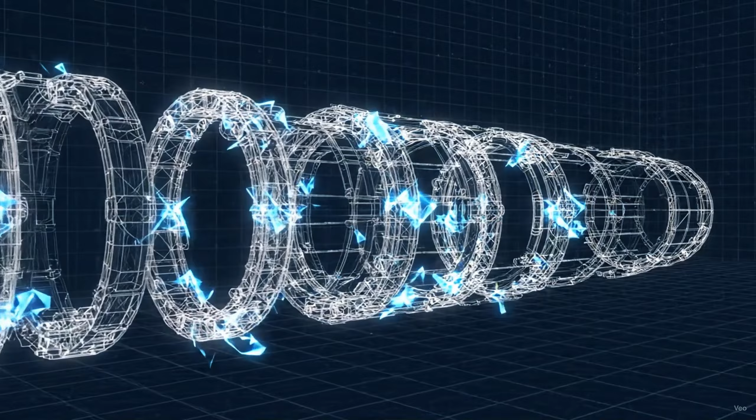To operate from aircraft carriers, an aviation platform requires more than just aerodynamic lift. It requires a structural foundation capable of surviving the most brutal kinetic impacts. The core skeleton begins with massive aluminum alloy bulkheads. This design generates a characteristic barrel-shaped fuselage, prioritizing absolute structural rigidity over minimal frontal area.

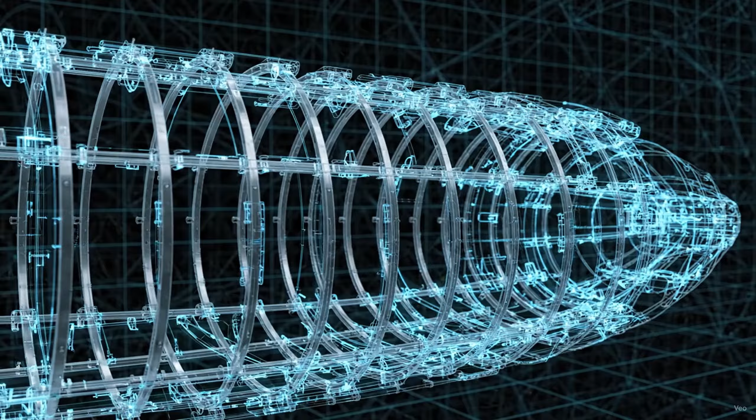Piercing through these bulkheads are dozens of longitudinal stringers. They interlock the entire skeleton into an unbreakable, cross-hatched alloy matrix. This is the semi-monocoque architecture, a design that mathematically distributes severe bending and torsional forces evenly across the entire geometry of the airframe. Wrapped around this skeleton is the aluminum alloy skin.

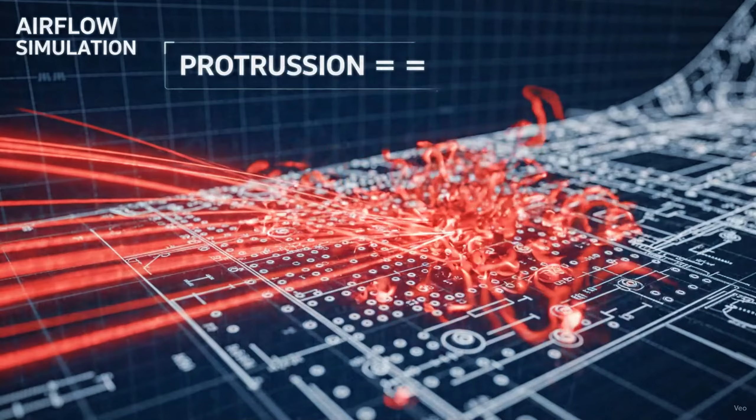In a semi-monocoque design, the skin itself acts as a critical, load-bearing structural membrane. However, at flight speeds exceeding 600 kilometers per hour, even the smallest protruding rivet head creates aerodynamic turbulence, generating massive drag. The mathematical equation is clear: protrusion equals parasitic drag. Tens of thousands of standard rivets would mathematically steal the aircraft's top speed.

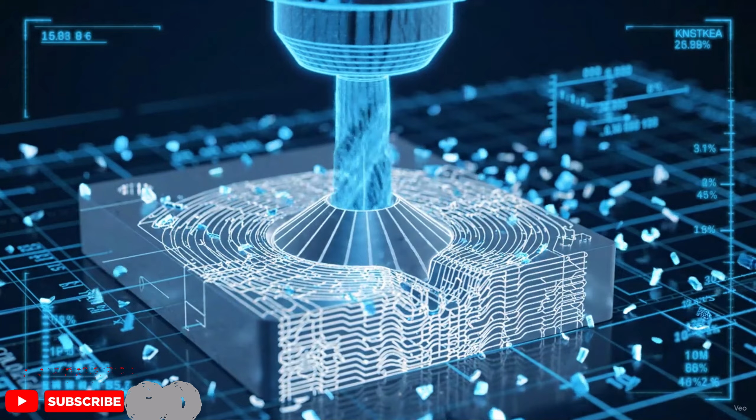Grumman's solution was flush riveting. The manufacturing process demanded that a precise conical depression be countersunk into every single rivet hole. An angled flat-headed rivet is then inserted. The geometric result is a rivet head that sits absolutely flush and uniform with the exterior aluminum surface.

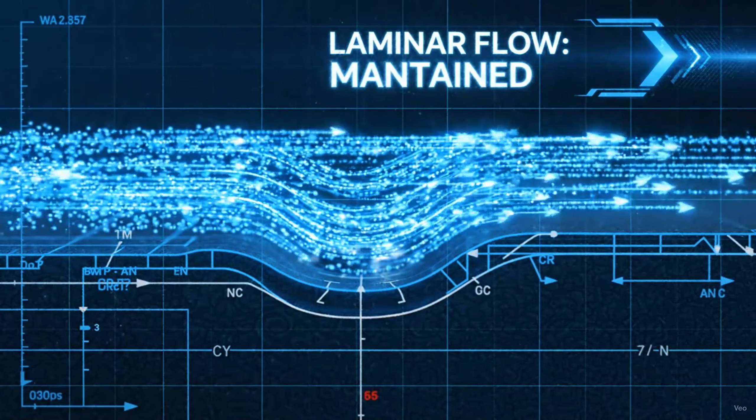When the airflow vector makes contact, laminar flow is perfectly preserved. Zero aerodynamic turbulence is generated across the joint. The manufacturing team, famously known as the Ironworks, applied this meticulous technique to tens of thousands of rivet holes across the entire massive airframe. The structural equation is finalized: flush riveting combined with a semi-monocoque frame provides absolute rigidity, alongside the lowest possible aerodynamic drag.

The core fuselage is complete. But to operate on a carrier deck, an aircraft requiring massive lifting surfaces must somehow solve an extreme spatial dilemma. An aircraft carrier deck is an incredibly scarce geometric plane. The fighter is mathematically required to retract its wingspan at all costs. To solve this spatial dilemma, Grumman engineered a unique folding mechanism that defied traditional geometric constraints.

From the wing roots, the algorithm generates the main lifting surfaces. The wingspan of this machine was designed to massive proportions to maximize aerodynamic lift. However, when measured against the coordinates of a standard carrier elevator, a spatial conflict immediately occurs. The wingspan far exceeds the allowable geometric limits.

To resolve this paradox, a mechanical masterpiece was engineered precisely at the wing root. X-ray vision exposes the Sto-Wing hinge. The pivot axis is not vertical or horizontal. It is positioned at a highly specific, mathematically complex diagonal compound angle.

When activated, a high-pressure hydraulic cylinder floods with fluid, generating a massive kinetic vector that forces the heavy wing structure to break its locked position. Governed by the angled axis, the wing does not simply fold upwards. It executes two simultaneous movements, sweeping backward toward the tail, while physically twisting 90 degrees.

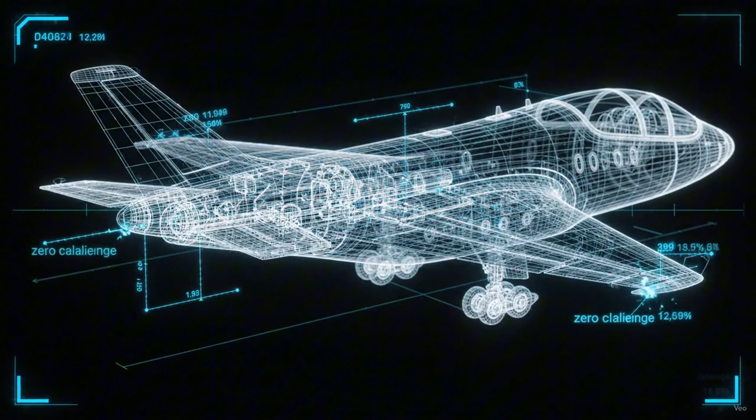This twisting motion directs the leading edge straight down to the deck, allowing the entire flat surface of the wing to rest perfectly parallel and flush against the fuselage. Thanks to the Sto-Wing mechanism, the deck footprint is slashed by a staggering 65%. This allowed vastly more aircraft to be packed into the confined space of a carrier.

Yet any mechanical joint introduces a fatal physical weak point. A folding wing risks being literally torn from the fuselage under the massive aerodynamic forces of flight. To overcome this, massive forged steel locking pins are utilized. Driven through thick steel lugs, they mechanically fuse the folding joint back into a solid, monolithic block.

During load testing, even as massive lift vectors violently strike the wing surface, the steel pins remain unyielding. Absolute structural integrity is maintained. The spatial dilemma is solved. The diagonal folding system provides minimum parking footprint without sacrificing a fraction of combat survivability. Tested against the elevator coordinates once more, the massive aircraft now fits perfectly within the rigid geometric boundaries of the carrier. The entire wing and load-bearing fuselage geometry is now locked.

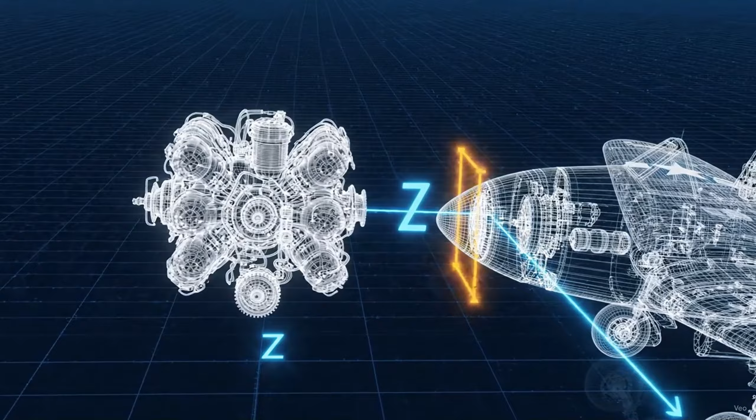This immense structure awaits a mechanical heart powerful enough to hurl it into the sky. A massive cylindrical void is mapped at the nose of the aircraft. This coordinate space will house one of the most devastating radial power plants in aviation history. To provide thrust for an oversized airframe, the machine required a colossal power source.

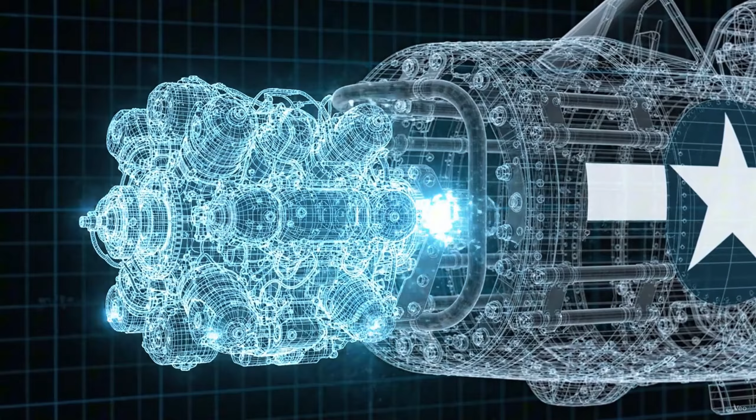The algorithm initializes the Pratt & Whitney R2800 Double Wasp. This massive engine block is mounted directly to the forward firewall, completely filling the established geometric coordinates. Its geometric architecture is a two-row radial. 18 cylinders are arranged in two staggered circular banks, with 9 cylinders per row revolving around a central axis.

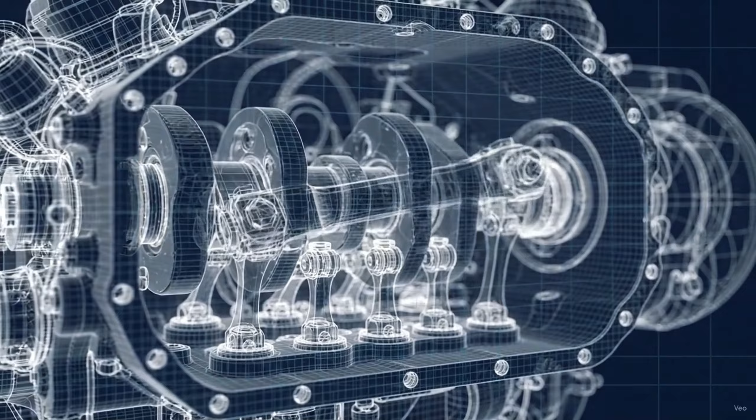X-ray vision strips away the casing. Within each row, 8 articulating rods are mechanically pinned to a single massive master rod. All connect to a shared crank throw. As the engine operates, 18 pistons move in rhythm. The staggered firing order creates perfect kinematic balance, neutralizing destructive vibrations.

The linear compression from 18 combustion chambers converges at the center, completely converting into massive rotational torque vectors on the crankshaft. At high RPM, this rotating mass of metal generates immense centrifugal force.

Left unchecked, this force would mathematically tear the engine block apart from the inside out. To counter this, geometric counterweights forged directly into the crankshaft swing opposite the pistons, perfectly canceling out the centrifugal forces and stabilizing the machine. Mechanical stability is achieved, but it brings a thermodynamic dilemma.

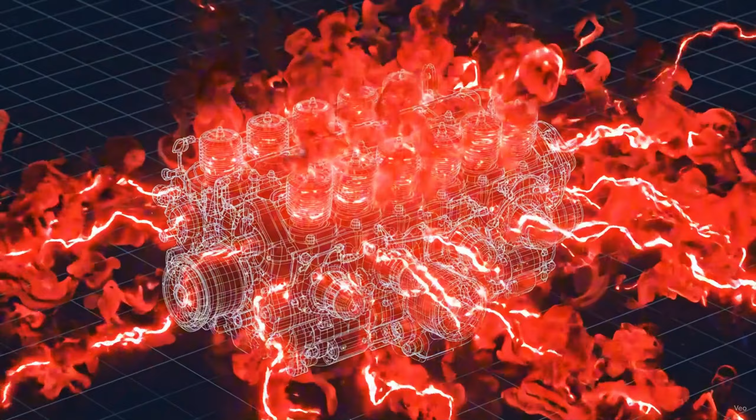These 18 cylinders constantly generate enough radiant heat to melt the engine itself. The solution lies in microgeometry. The surfaces of the cylinders are cast with incredibly dense forged aluminum cooling fins, multiplying the contact area mathematically.

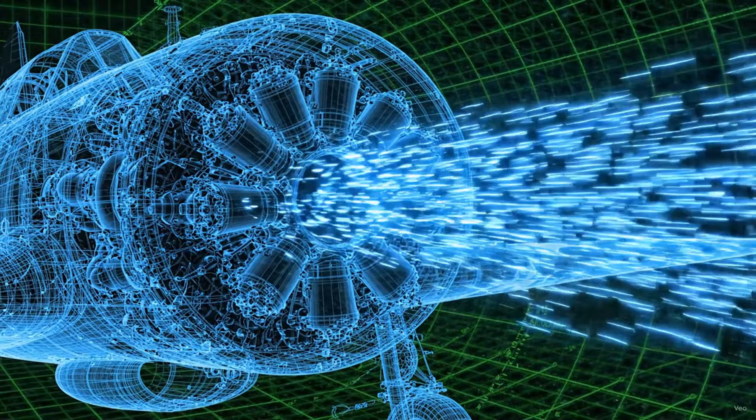As the aircraft surges forward, the characteristic open-nose design catches a colossal volume of ram air, forcing it directly into the face of the radial engine. Fluid dynamics strip all radiant heat from the metal surfaces. This purely air-cooled system completely eliminates the fragility of liquid coolant radiators.

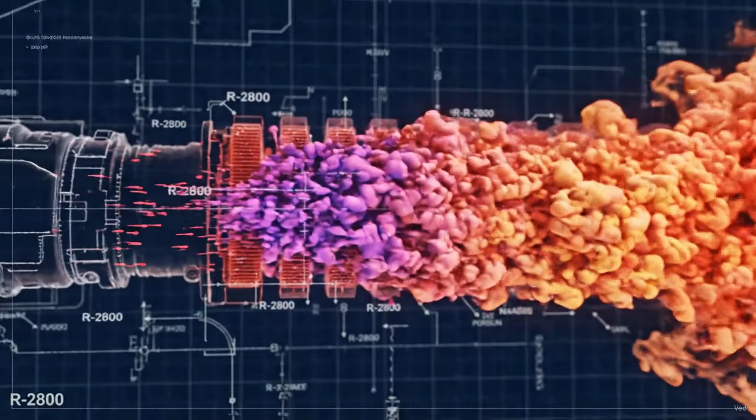This superheated airflow is then violently expelled through adjustable cowl flaps, allowing the pilot to precisely regulate the engine block temperature. With a stable thermodynamic baseline, the double WASP engine officially reaches its design output: 2,000 horsepower of pure kinetic thrust.

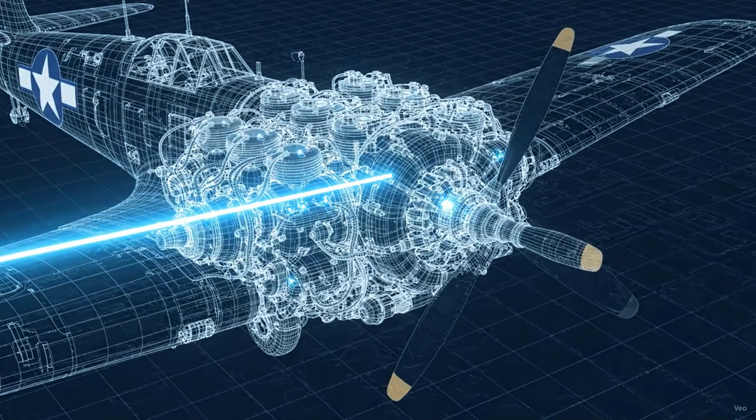2,000 horsepower is sufficient for low altitudes, but to maintain dominance in thin air, this machine incorporates a highly sophisticated air compression system mounted behind the block.

2,000 horsepower is the baseline at sea level, but as the aircraft climbs to tactical altitudes, a severe environmental constraint emerges: atmospheric pressure. At 20,000 feet, air density drops drastically. The fluid dynamic vectors become sparse, mathematically depriving the engine of the oxygen required for maximum combustion.

Without intervention, the engine suffers severe oxygen starvation. The mathematical output plummets, stripping the heavy fighter of its primary advantage. To reclaim this lost energy, a massive forced induction system is bolted to the rear of the crankcase: the two-stage, two-speed mechanical supercharger.

X-ray reveals the internal impeller. Driven by a complex gear train connected to the crankshaft, this geometric turbine spins at incredibly high RPMs. The sparse high-altitude air is sucked into the blades and violently compressed, mathematically restoring sea-level density to the oxygen vectors before they enter the cylinders.

But compressing a gas inherently generates heat. The dense air charge becomes superheated, creating a new thermodynamic bottleneck within the intake manifold. Despite the thermal penalty, the mathematical volume of oxygen succeeds. The supercharger restores the full 2,000 horsepower, even at 20,000 feet.

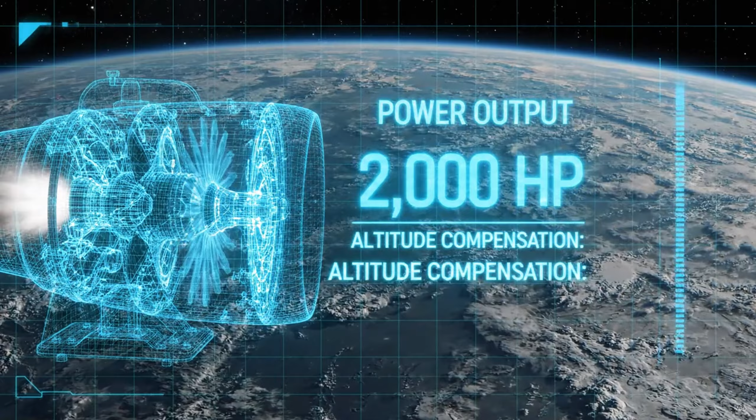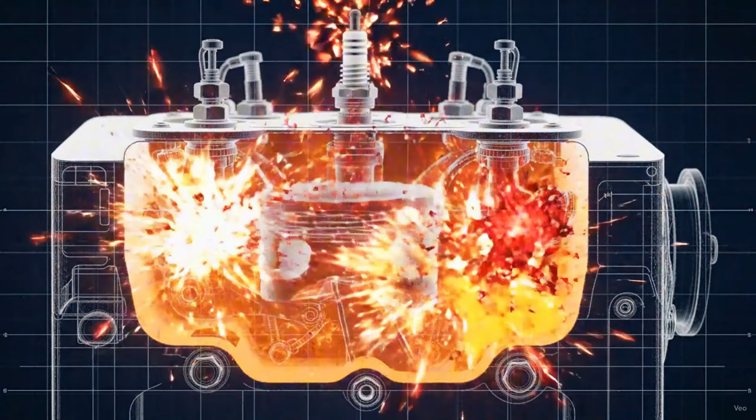But survival in combat sometimes demands breaking the limits. When the pilot pushes the throttle past the red line, war emergency power is activated. Forcing more fuel and superheated air into the cylinder creates a lethal physics problem. The extreme temperature causes the mixture to detonate prematurely, threatening to shatter the piston.

To bypass this thermal limit, Grumman integrated a chemical intervention. A specialized tank is mounted behind the firewall, holding a precise mixture of water and methanol. During WEP, this fluid is injected directly into the intake manifold, mixing with the superheated, highly compressed air charge. As the water evaporates, it absorbs massive amounts of thermal energy through the latent heat of vaporization.

The hot air charge is instantly quenched, becoming cool and incredibly dense. With the detonation threshold mathematically bypassed, extreme amounts of fuel can be burned safely. The engine's output violently spikes past 2,200 horsepower.

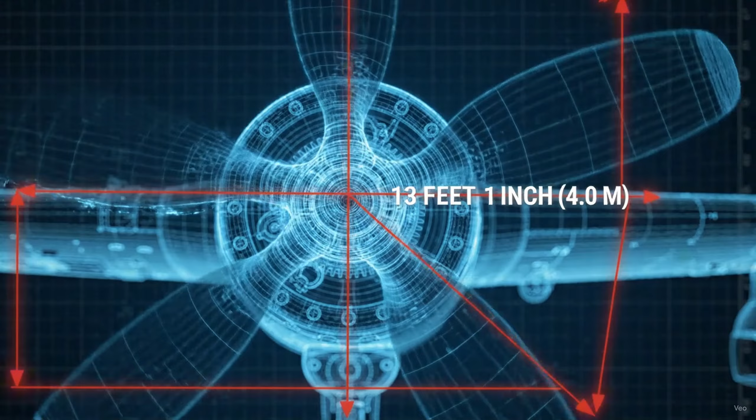To convert 2,000 horsepower into kinetic forward motion, the aircraft relies on a massive propulsive mechanism. The Hamilton Standard Propeller Hub locks onto the main shaft. From this hub, 3 immense aluminum blades extend outward. The total diameter spans over 13 feet, an absolute geometric necessity to absorb the engine's extreme output.

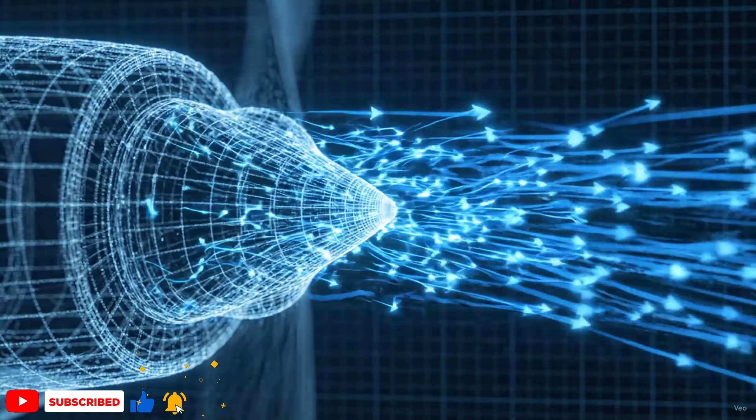As the engine engages, immense rotational torque vectors are transferred directly into the hub, spinning the colossal blades up to operational RPM. A microscopic cross-section reveals the physics. Each blade is essentially a rotating wing, featuring a precise aerodynamic airfoil geometry designed to slice through the atmosphere.

Through aerodynamic lift principles, the rotational torque is mathematically converted. The pressure differential generates massive forward-facing thrust vectors, pulling the entire machine forward.

However, as the aircraft accelerates to high speeds, a critical aerodynamic dilemma occurs. The relative velocity of the incoming air drastically alters the physics of the blade. At high forward speeds, a fixed blade effectively loses its bite on the air. Aerodynamic resistance drops, and the generated thrust shrinks dramatically.

With less air resistance holding it back, the massive engine begins to spin out of control. RPM spikes violently, mathematically threatening to destroy the internal cylinders.

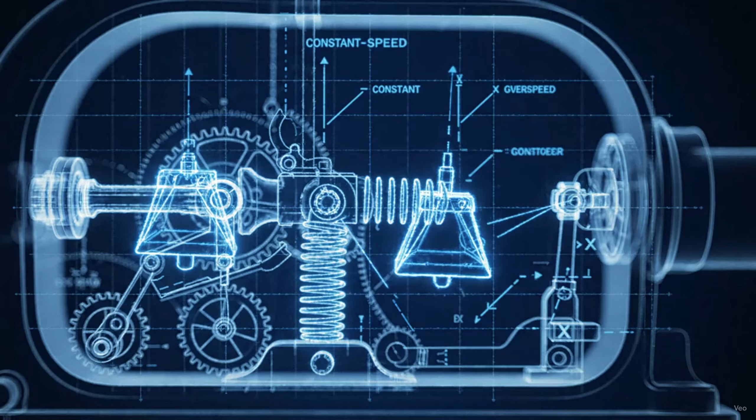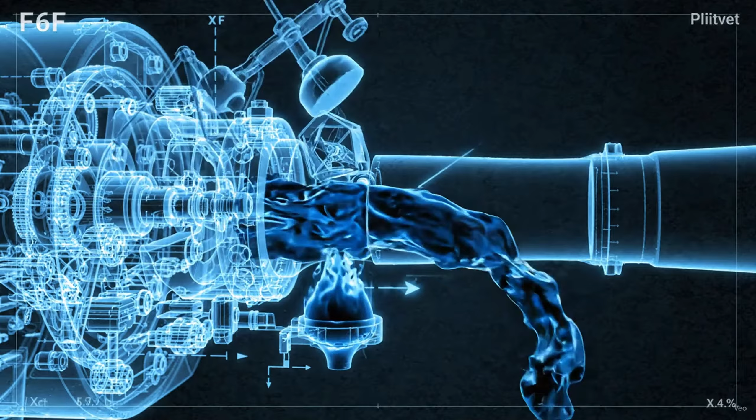To prevent catastrophic failure, Grumman utilized a Hamilton Standard constant speed governor, a brilliant mechanical computer hidden directly behind the propeller hub. Inside the governor, centrifugal flyweights spin with the engine. As RPM increases, centrifugal force mathematically throws these weights outward, mechanically sensing the overspeed condition.

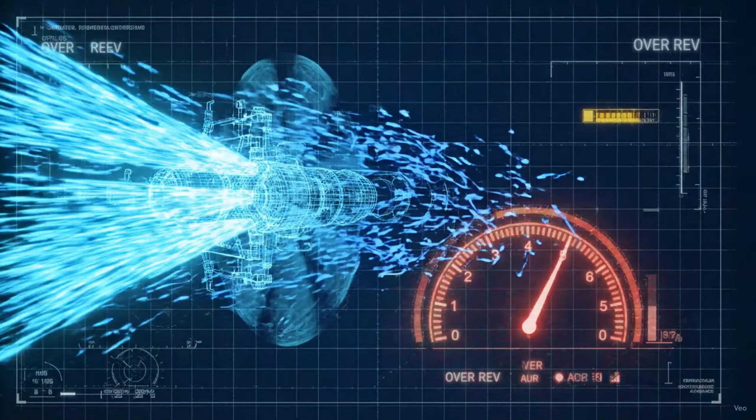This outward movement opens a precise pilot valve. Highly pressurized engine oil is immediately routed through the hollow propeller shaft and straight into the hub dome. This hydraulic pressure physically rotates all three massive aluminum blades along their longitudinal axes. The blades increase their pitch, taking a much deeper geometric bite into the incoming air. The increased aerodynamic resistance instantly loads the engine.

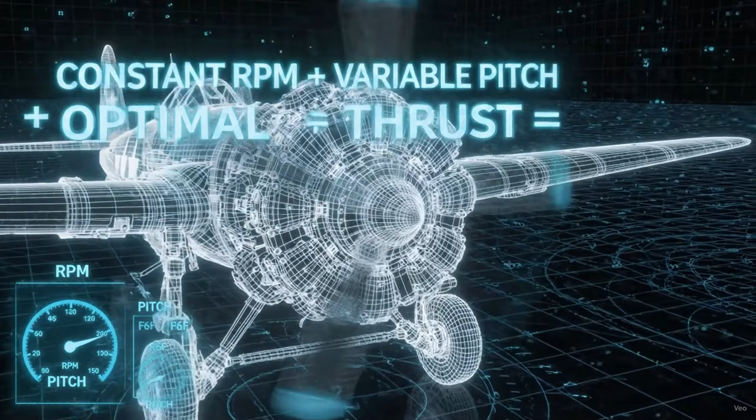Massive thrust vectors are restored, and the engine RPM is mathematically forced back down into the optimal green zone. This entirely automated feedback loop forms the ultimate propulsive equation. Constant RPM plus variable pitch equals mathematically optimal thrust at any airspeed.

With pure thrust successfully generated, the kinetic energy must now be weaponized against gravity. The blueprint shifts focus to the colossal geometric lifting surfaces of the main wings. With thrust established, the kinetic energy must be converted into flight. The algorithm highlights the immense geometric lifting surfaces of the main wings.

However, this airframe faces a severe physical constraint. Fully loaded, it possesses a massive gross weight of nearly 6 tons. Gravity violently pulls the geometric structure downward. To overcome this gravitational penalty, Grumman engineered a colossal lifting surface. The calculated wing area spans an enormous 334 square feet.

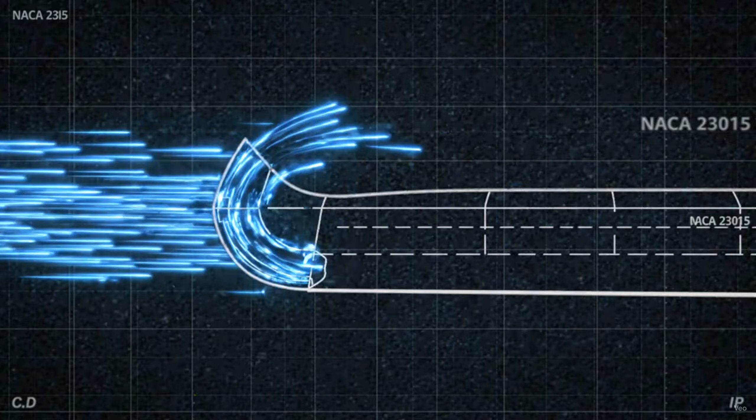But surface area alone is not enough. The secret to its aerodynamic capability lies within the precise geometric profile of the wing. A cross-section reveals the NACA 23015 airfoil. This specific mathematical contour features a thick, blunt leading edge designed for maximum lift at lower speeds.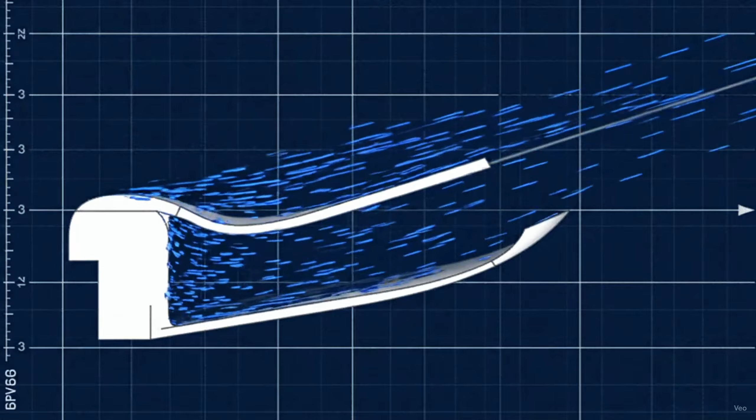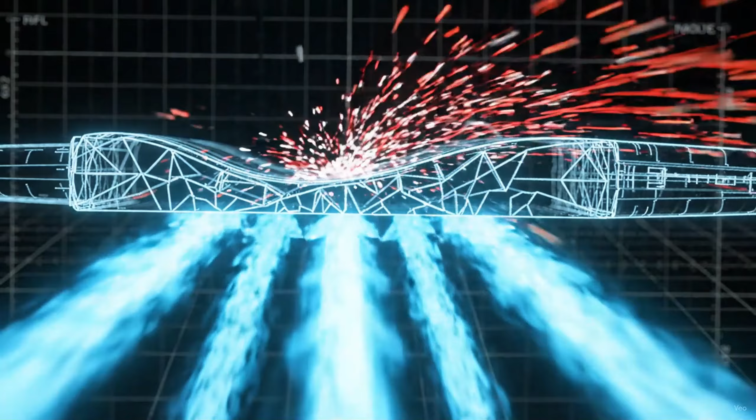As the aircraft is pushed forward by the propeller, fluid dynamic vectors strike the leading edge, mechanically splitting the airflow over the top and bottom surfaces. Due to the pronounced upper camber, the air over the top accelerates, creating a zone of low aerodynamic pressure. Meanwhile, high pressure builds underneath. This pressure differential mathematically attempts to equalize. The high pressure pushes upward toward the low pressure, generating massive vertical lift vectors.

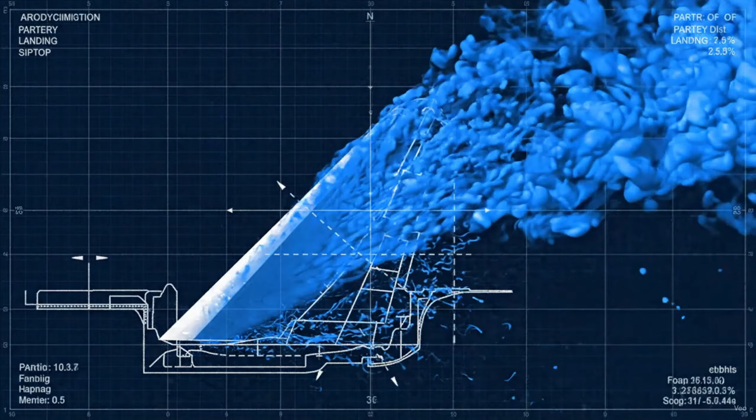Multiplied across 334 square feet, the total kinetic lift vastly overpowers the 6-ton gravitational penalty, lifting the immense airframe into the sky. However, landing on a carrier deck requires flying at incredibly low speeds, with a high angle of attack. On standard wings, this steep angle causes the airflow to detach, resulting in a fatal stall.

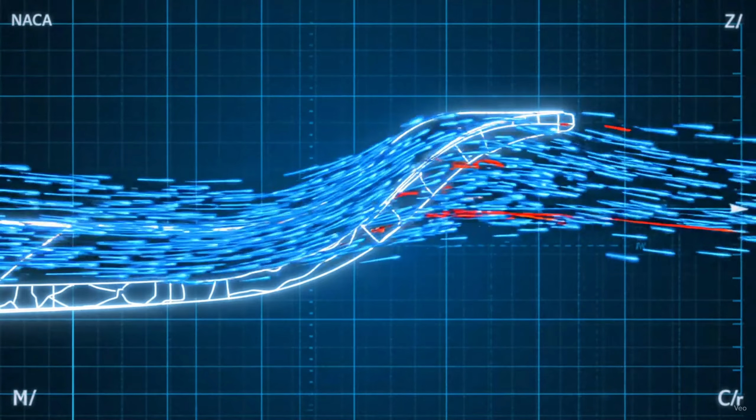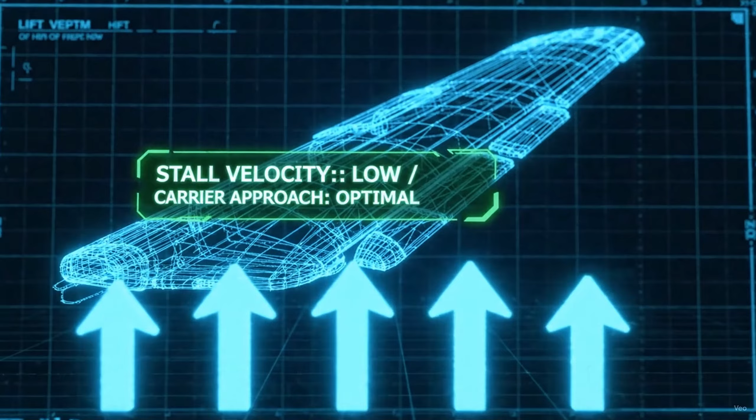This is where the NACA 23015 excels. Its blunt, thick leading edge mathematically forces the airflow to remain attached to the upper surface, refusing to stall, even at extreme angles. Because lift is maintained, the stall velocity is kept exceptionally low. This grants the pilot docile, predictable handling during the most dangerous phase of flight, the carrier approach.

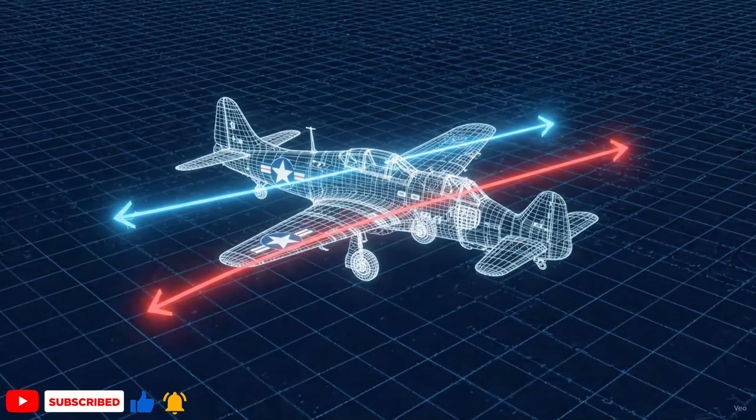The aerodynamic equation is solved. Massive surface area combined with the NACA 23015 profile yields supreme lift capacity, neutralizing the weight penalty. The machine has achieved absolute kinematic equilibrium. Thrust defeats drag, lift defeats gravity. It is now a fully functional aviation platform.

With flight mechanics established, the blueprint must secure the single most critical component on board, the central human processing node. The algorithm isolates the central volumetric space of the fuselage. Into this space, the central processing node is inserted. This singular unit is responsible for all tactical, navigational, and thermodynamic calculations during flight.

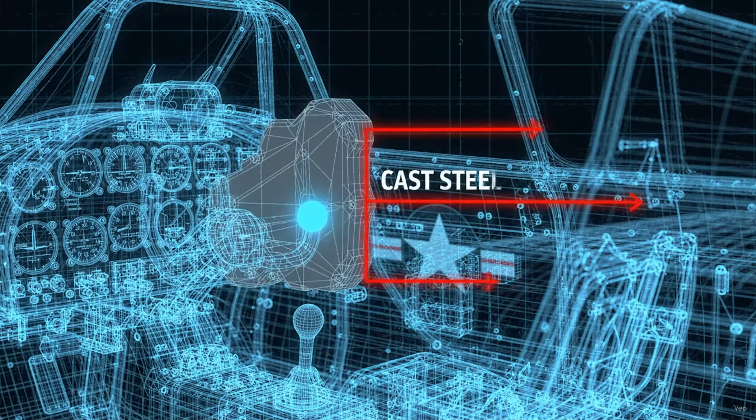However, this node is incredibly fragile. A kinetic threat simulation reveals extreme vulnerability to high-velocity ballistic vectors approaching from the rear hemisphere. To neutralize this, Grumman integrated absolute structural brute force. A massive geometric plate of cast steel armor is bolted directly behind the node. When the kinetic vectors strike, the sheer density of the steel geometry denies penetration. The ballistic energy is mathematically shattered, leaving the central node completely untouched.

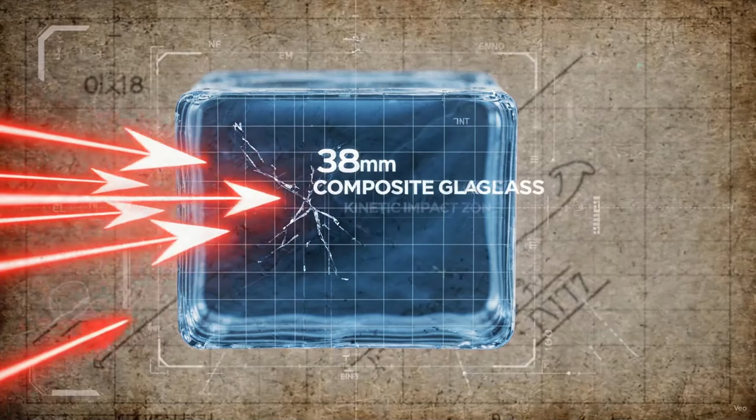However, ballistic threats are omnidirectional. A frontal assault simulation directs kinetic energy straight through the forward optical canopy. Standard aviation plexiglass is replaced here with a geometric anomaly, an exceptionally thick, flat block of 38mm bullet-resistant glass. When the forward vectors strike, the outer geometric layers shatter to dissipate the energy, but the sheer density of the block mathematically absorbs the impact, halting the projectile entirely.

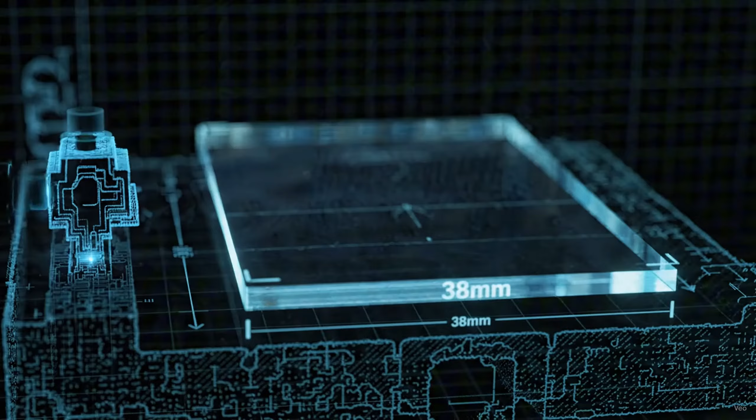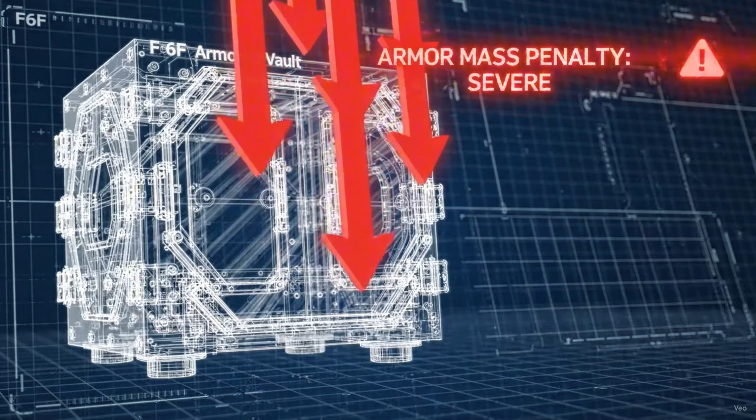To complete the perimeter, additional steel geometric plates are layered underneath the node, creating an armored lower tub to deflect anti-aircraft fire from below. This complete encapsulation transforms the cockpit from a standard seating area into an absolute geometric vault, securing the node's survivability. Despite this massive shielding, optical capability is perfectly preserved. Because the 38mm glass is a mathematically flat plane, line-of-sight ray tracing passes through with zero optical distortion.

But this brute force philosophy extracts a heavy cost. The sheer mass of the steel and glass generates massive downward gravitational vectors, heavily penalizing the aircraft's weight limit. Yet, the equation remains balanced. The colossal aerodynamic lift generated by the immense wing area completely offsets this armor penalty, allowing the machine to carry the vault with ease. The mathematical synthesis is finalized.

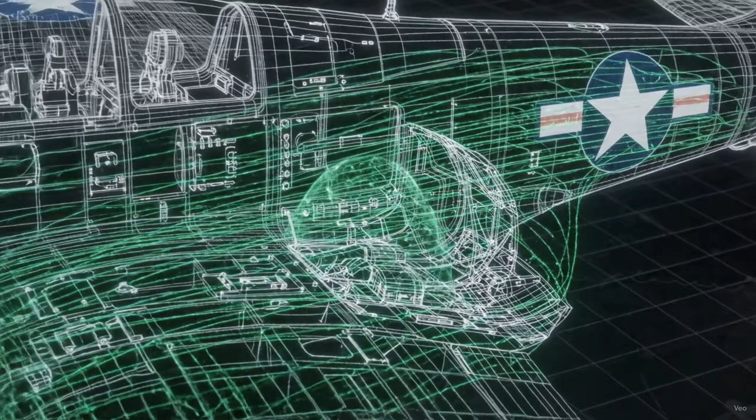Extreme armor mass, fully supported by supreme aerodynamic lift, equals absolute node survivability. With the central processing node secured, the algorithm must now address a highly volatile chemical vulnerability housed deep within the lifting surfaces. To sustain the massive 2,000 horsepower output, the aircraft requires a vast chemical energy reserve.

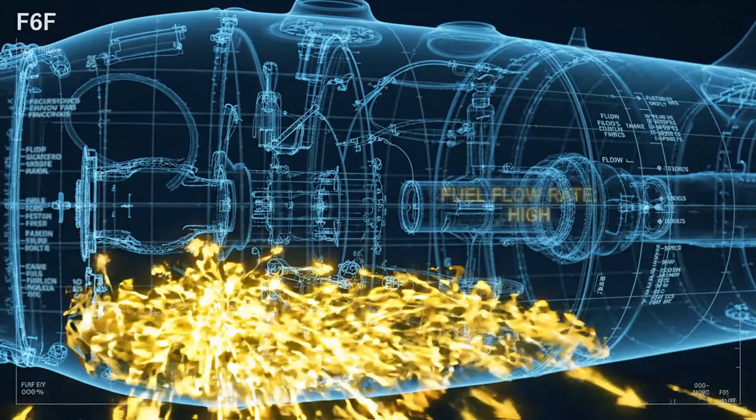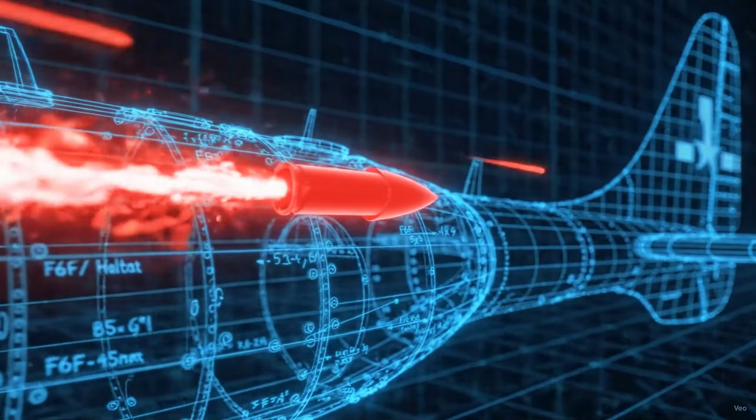The algorithm maps the internal voids of the fuselage and wing roots. Into these coordinates, thick, heavy geometric bladders are inserted. These main fuel cells house the highly volatile aviation fuel required for long-range combat operations. X-ray analysis reveals the interior rapidly filling with highly active fluid dynamic vectors, representing hundreds of gallons of high-octane aviation fuel. However, housing this much volatile liquid creates a massive vulnerability.

A kinetic threat simulation introduces a high-velocity ballistic vector striking the tank wall. In a standard metal tank, a puncture guarantees a catastrophic leak. The volatile fluid vectors vaporize into the fuselage, immediately resulting in mathematical and structural annihilation.

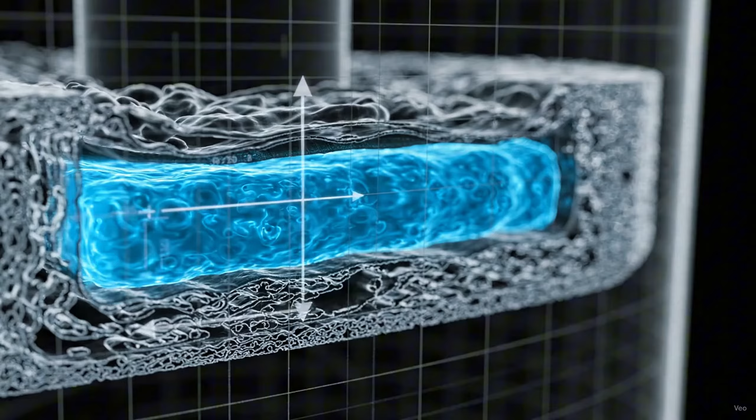To prevent this, Grumman utilized advanced chemical engineering. The tank wall is constructed from 3 distinct geometric layers, completely eliminating traditional metal shells. The critical component is the thick middle layer. It is composed of raw, untreated natural rubber, or latex, a highly reactive material purposely placed within the barrier.

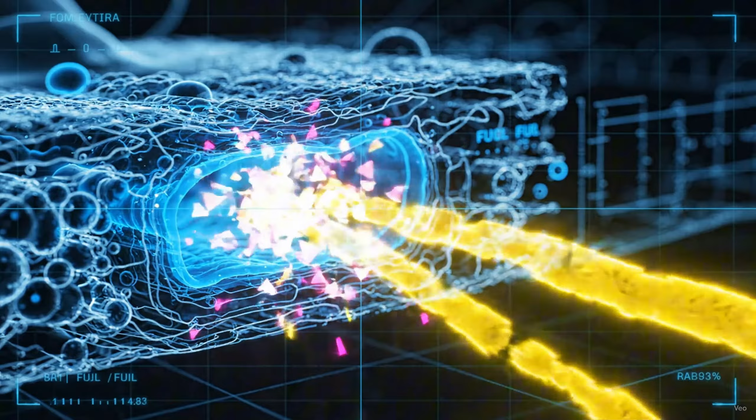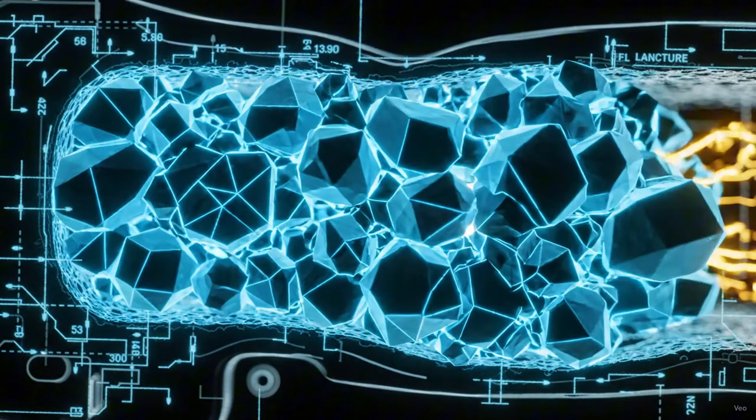When the kinetic threat strikes, the bullet still pierces mathematically through all 3 layers of the bladder, opening a puncture channel. Aviation fuel begins to leak into the channel. However, the moment the volatile fuel makes physical contact with the exposed raw latex, an immediate chemical reaction is triggered. The untreated rubber absorbs the fuel and rapidly swells. The geometry expands volumetrically inward, physically swelling to block the puncture channel.

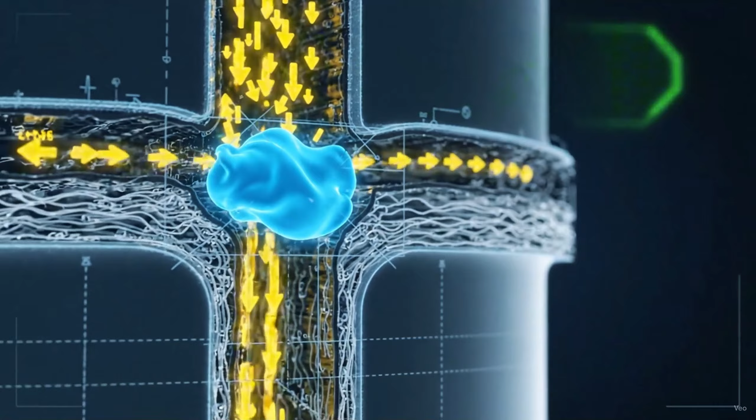Within seconds, the breach is completely sealed. The highly volatile fluid is mathematically contained, halting the leak entirely. Even under sustained ballistic assault, the chemical reaction patches every hole instantly. The threat of a catastrophic in-flight fire is mathematically reduced to near zero.

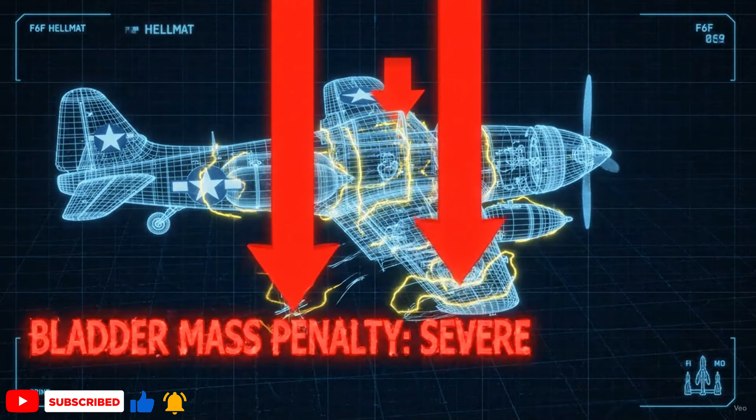But these multi-layered rubber bladders are incredibly heavy. Once again, Grumman accepted a massive structural weight penalty to guarantee absolute survivability. And once again, the colossal lift of the wings nullifies the weight penalty. The equation is clear: chemical expansion ensures absolute fluid survivability.

With the central node and vital fluids physically secured, the blueprint now shifts from absolute defense to absolute offense. The algorithm targets the outer wings. With the defensive parameters mathematically established, the algorithm now shifts to absolute offense. Precise coordinates are mapped across the outer wing panels.

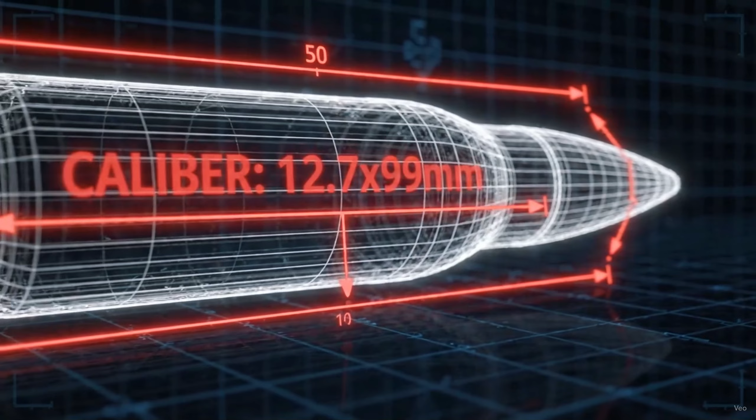Into these voids, the blueprint integrates a devastating arsenal. 6 M2 Browning 50 caliber machine guns are locked into the airframe, 3 mounted within each wing. A top-down analysis reveals a staggered geometric layout. The weapons are offset diagonally to fit mathematically within the aerodynamic tapering of the airfoil. The ammunition is the 12.7mm cartridge, a massive, heavy kinetic penetrator carrying immense destructive potential.

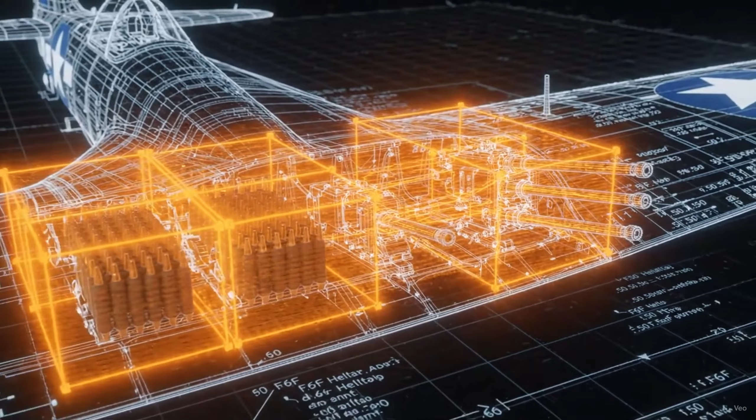To sustain fire, immense internal space is required. Enormous volumetric bays are mapped directly behind the weapons, designed to store 400 rounds per gun. Heavy, continuous geometric belts link the storage bays to the receivers. However, feeding this massive weight of brass and lead into the weapon requires significant physical force.

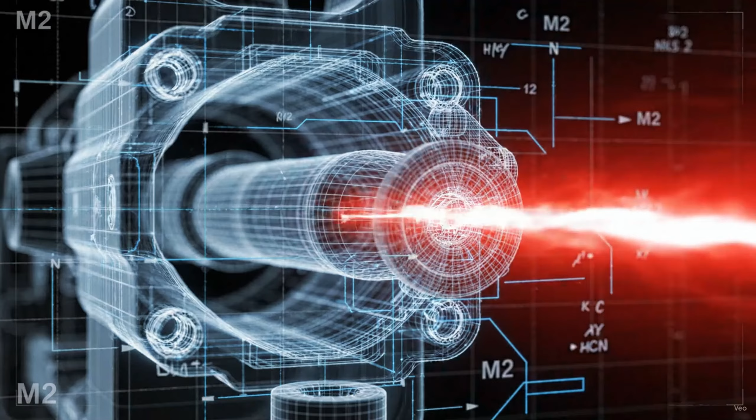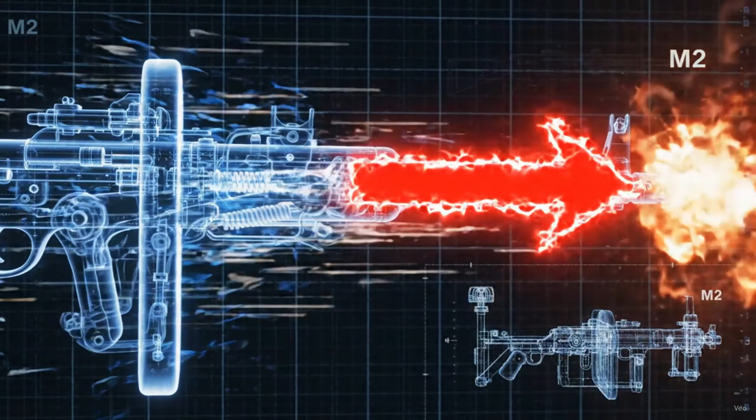X-ray analysis reveals the internal mechanism of the Browning. It utilizes a short recoil operation. The geometric bolt and barrel extension are locked together. Upon ignition, thermodynamic expansion violently expels the projectile forward. But according to physics, every action dictates an equal and opposite kinetic reaction. A massive recoil vector strikes backward.

This immense kinetic energy is harnessed, physically driving the heavy bolt and barrel assembly backward to unlock the action. As the bolt travels rearward, an extractor physically rips the spent brass casing from the chamber and forcefully ejects it from the mechanism. Simultaneously, this same recoil energy drives a feed pawl. It mechanically grabs the heavy ammunition belt and physically drags the next massive cartridge into position. A return spring slams the bolt forward, chambering the new round. The cycle instantly repeats, generating an automated, blindingly fast mechanical loop.

Multiplied across 6 independent weapons, this recoil-operated automation unleashes a devastating continuous stream of 12.7mm ballistic vectors into the airspace ahead. The weapon's mathematical logic is finalized. The gun utilizes its own violent kinetic recoil to physically drag the immense weight of its ammunition, automating its own destruction loop. The internal mechanics of the arsenal are secured.

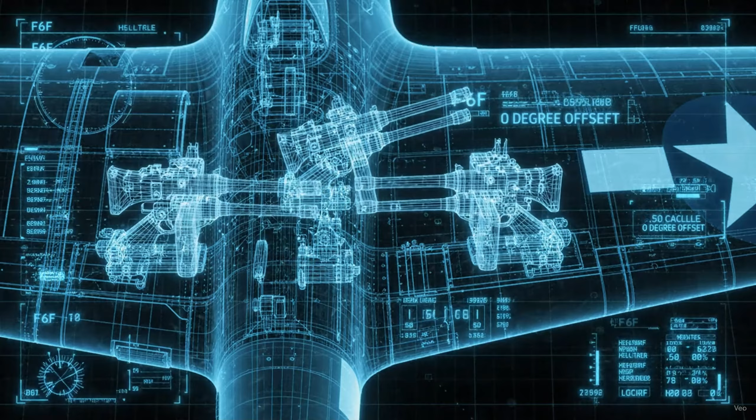However, having 6 weapons spread across an enormous wingspan introduces a critical geometric problem. How do these parallel vectors hit a single target? If the 6 wing-mounted weapons are aligned perfectly parallel to the fuselage, a severe geometric flaw emerges within the ballistic physics. Because the weapons are spread across an immense wingspan, a small, distant geometric target can literally slip mathematically through the wide gaps between the parallel bullet streams. The equation is absolute: parallel vectors resulting from a wide, wing-mounted arsenal equal total tactical failure. To solve this, the internal mounting hardware is adjusted.

The geometric wireframes of the machine guns are physically angled slightly inward, toward the aircraft's central axis. Because each weapon sits at a different distance from the center line, each mount is mathematically calibrated to a highly specific fractional inward angle. These angles are not arbitrary.

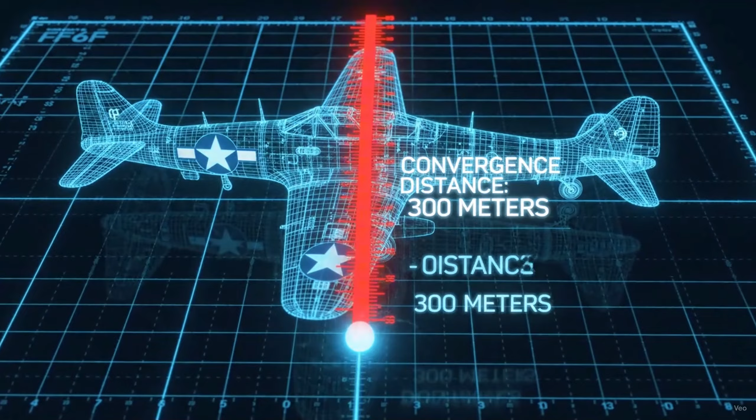They are calculated to target a highly specific spatial coordinate far ahead of the aircraft. A dimension line measures the distance. The coordinates are locked to a standard focal point exactly 300 meters ahead of the machine. The 6 weapons open fire, now governed by their angled mounts, the ballistic streams project inward, traveling along precise converging mathematical trajectories.

At exactly 300 meters, all 6 streams arrive simultaneously. They physically intersect, creating a geometric point of absolute convergence. By overlapping the streams, the aircraft concentrates the kinetic energy of 6 heavy machine guns into a single, blindingly dense focal point. This is the ultimate kill zone.

When an enemy geometric node enters this specific coordinate space, it is struck by the combined mass of all 6 weapons simultaneously. The structural integrity of the target is mathematically and instantly annihilated. However, this geometry dictates a strict engagement window. Beyond the 300-meter mark, the vectors cross and spread wide, drastically diluting the kinetic density.

The offensive algorithm is secured. Angled wing mounts combined with a fixed geometric distance create an inescapable zone of lethal ballistic convergence.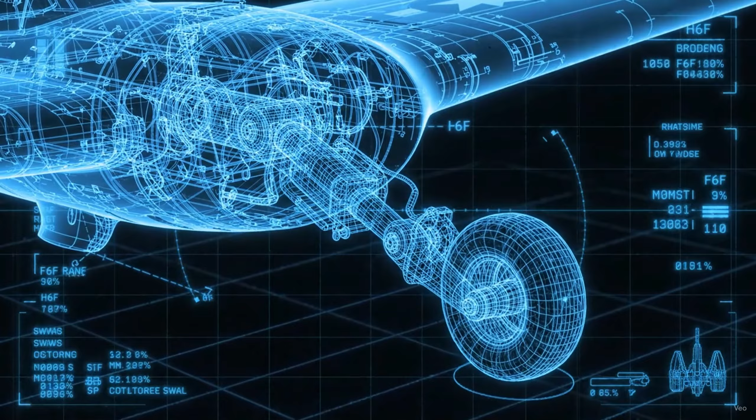With total air superiority established, the machine must eventually return to the deck. The algorithm now targets the extreme mechanical complexity of the landing undercarriage. To return safely to the deck, the machine requires a robust undercarriage. The algorithm isolates the geometric coordinates beneath the wing roots. A massive, heavy-duty geometric strut and tire assembly is inserted.

However, stowing this massive appendage presents a severe spatial paradox. If the gear folds straight up, it immediately collides with the internal ammunition bays. The geometric volume of the wing is already entirely consumed by the offensive arsenal. To bypass this, Grumman engineers designed a brilliant kinematic mechanism.

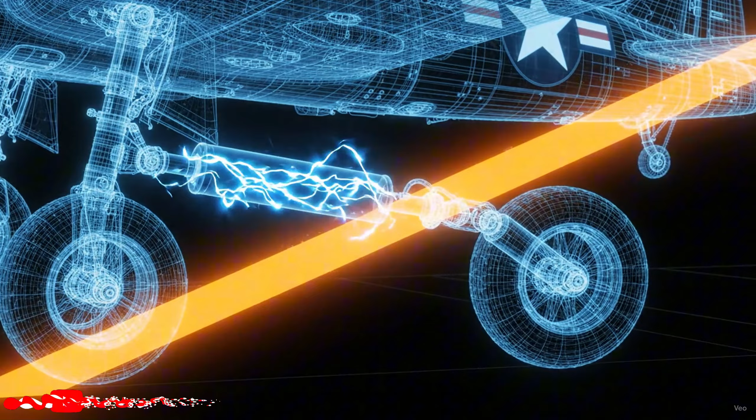X-ray vision reveals a specialized rack and pinion gear assembly integrated directly into the pivot trunnion. When the hydraulic actuator is engaged, immense fluid pressure generates a pulling vector, physically drawing the massive steel strut backward into the fuselage recess. As the strut swings backward, the pinion gear rolls along a fixed rack. This mathematically converts the linear backward motion into a powerful rotational twisting force.

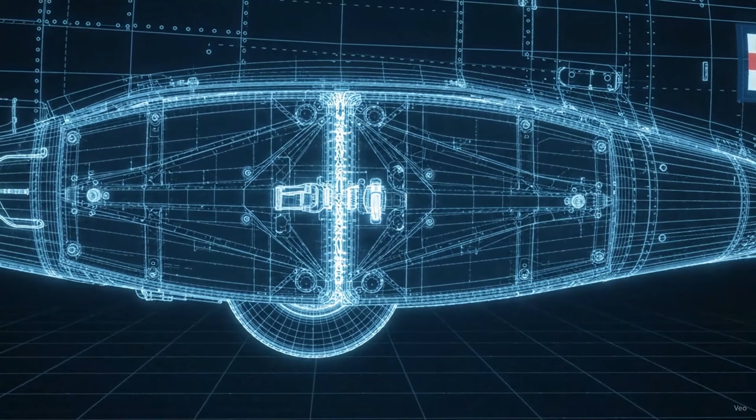Driven by the trunnion gears, the entire shock strut and the massive rubber tire physically twist along their vertical axis, while simultaneously sweeping backward. A digital protractor validates the kinematics. By the time the strut reaches the fuselage, the tire has rotated exactly 90 degrees. This 90-degree twist allows the massive wheel to lay perfectly flat, nesting seamlessly into a remarkably shallow cavity beneath the wing root, entirely bypassing the internal arsenal.

Once nested, precise aerodynamic fairing doors slide shut, completely encapsulating the heavy undercarriage within the aerodynamic envelope. This flush sealing mathematically restores laminar flow to the underside of the fuselage, ensuring zero parasitic drag is generated during high-speed combat. The mechanism is completely reversible.

When deployed for a harsh carrier deck landing, the heavy forged steel construction absorbs the massive kinetic impact of a 6-ton machine without buckling. The paradox is mathematically resolved. Complex kinematics provide absolute spatial efficiency, leaving the wing volume entirely dedicated to lethal payload.

With the landing gear secured, the blueprint focuses on the ultimate kinetic challenge. Operating from an aircraft carrier demands mechanisms that can survive extreme acceleration and deceleration. The algorithm isolates the extreme rear of the fuselage. It is here that the airframe must absorb the most violent kinetic shocks in naval aviation.

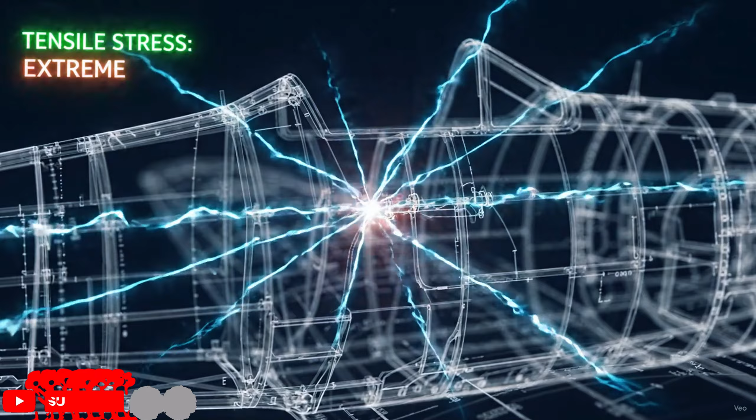Operating a 6-ton fighter from a carrier deck introduces an extreme physics problem, generating sufficient takeoff velocity within a severely constrained geometric runway. The aircraft cannot achieve this solely under its own power. The algorithm highlights highly reinforced structural hooks forged directly into the lower bulkheads. A heavy geometric steel cable, known as the catapult bridle, is attached from the deck machinery directly to these specialized coordinates on the airframe. The engine is pushed to absolute maximum output, generating massive forward thrust.

Simultaneously, a holdback fitting at the rear keeps the aircraft completely stationary. The potential energy is immense. This creates extreme tensile stress across the entire fuselage. The semi-monocoque skeleton from Phase 1 mathematically distributes this tearing force to prevent structural failure before launch.

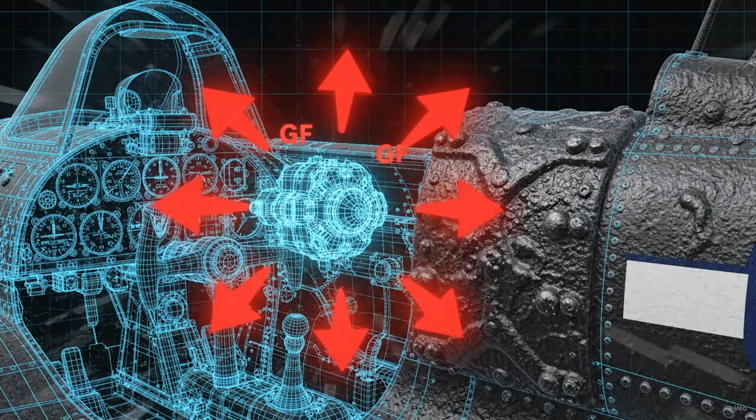The holdback fitting snaps, the deck machinery fires, a colossal kinetic vector surges through the catapult cable, violently accelerating the 6-ton machine forward. The acceleration is mathematically brutal. The velocity spikes from 0 to over 100 knots in a fraction of the geometric distance required for a standard takeoff. Internally, the immense acceleration generates extreme g-force vectors. The central processing node is violently pressed backward into the cast steel armor plate.

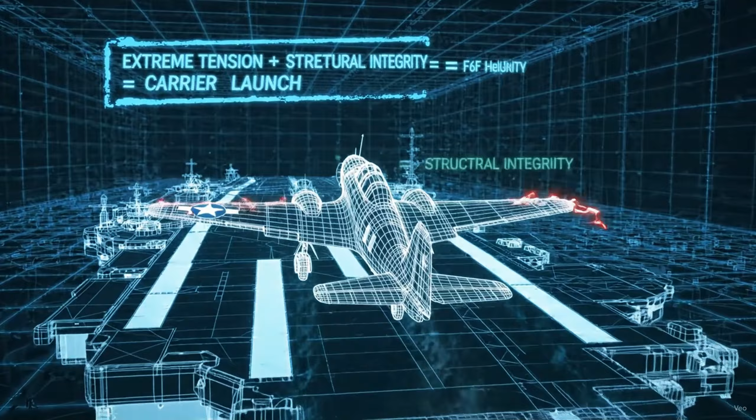Upon reaching the edge of the flight deck coordinates, the catapult bridle mathematically detaches. Freed from the external vector, the aircraft pitches upward into the airstream. At this exact coordinate, kinematic responsibility is handed over completely to the aerodynamic profile. The massive wing area instantly generates the required lift vectors to sustain flight. The physics of the launch are validated.

Extreme tensile force applied to absolute structural integrity equals a successful carrier launch. Getting into the air is only half the problem. Returning a 6-ton combat machine to a pitching deck requires an entirely different set of violent, decelerative mechanics. To survive the return to the carrier deck, the kinetic energy of a 6-ton machine must be instantly neutralized.

The algorithm targets the arresting hook assembly. The aircraft assumes the steep approach angle dictated by its airfoil geometry. It arrives at the deck with maximum aerodynamic stability, but massive kinetic momentum. The arresting hook is deployed. A heavily dampened geometric steel arm extends downward, locking into a highly precise mathematical angle relative to the deck.

On the carrier deck, 4 thick, high-tensile steel cables are mapped across the grid. The incoming aircraft must mathematically intersect at least one of these lines. Upon touchdown, the hook scrapes the deck. A successful kinetic intersection occurs. The forged steel geometry catches the third arresting cable.

Instantly, a colossal decelerative vector is generated. The entire forward momentum of a 6-ton combat aircraft is violently opposed by a massive backward kinetic force. The velocity mathematically collapses. The aircraft goes from 90 knots to absolute zero in the span of just a few dozen meters. X-ray analysis reveals the structural toll.

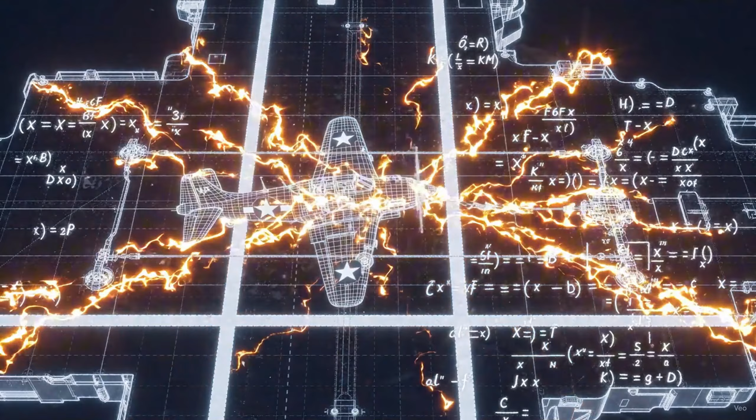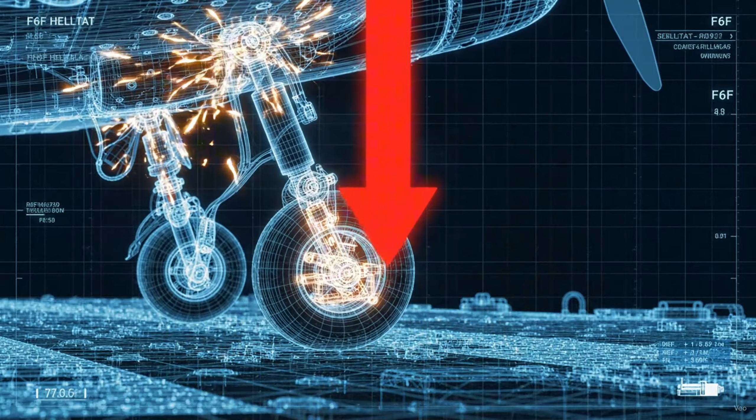The extreme tensile load attempts to rip the tail off the aircraft. The heavy semi-monocoque bulkheads distribute and absorb this devastating kinetic shock. The massive kinetic energy is not destroyed, it is transferred. The geometric wire stretches, pulling against hydraulic engines below the deck that mathematically dissipate the aircraft's momentum. Simultaneously, the vertical kinetic shock of hitting the deck is absorbed by the massive hydraulic struts of the undercarriage, preventing the heavy engine block from shattering the frame.

Internally, the violent deceleration creates immense forward G-forces. The central node is thrown forward, caught only by the geometric tension of a multi-point structural harness. With velocity at zero, the kinetic exchange is complete. The tension breaks, the cable drops away, and the 6-ton machine is perfectly secured on the deck coordinates. The physics of the recovery are validated. Extreme decelerative force absorbed by absolute structural integrity equals a successful carrier landing.

With both launch and recovery mechanics secured, the blueprint must face one final, ultimate test. How does this massive structure handle catastrophic geometric failure in combat? The algorithm prepares for the final phase, subjecting the semi-monocoque Ironworks framework to devastating kinetic ballistic trauma. The ultimate test of the Ironworks philosophy is structural resilience. A simulation introduces a massive, dense swarm of incoming kinetic vectors.

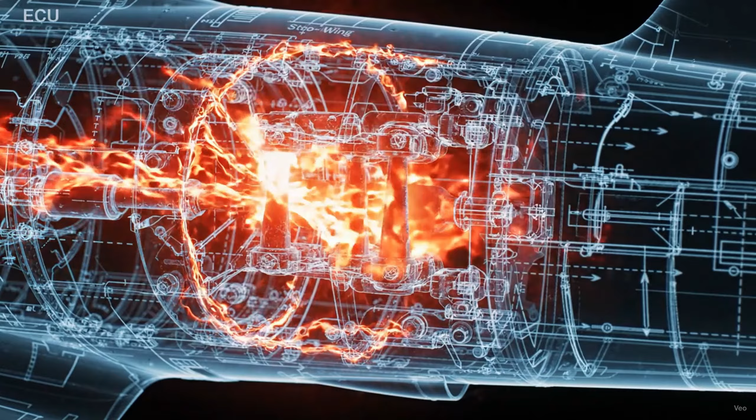The vectors strike the right wing. The kinetic trauma is overwhelming. A significant percentage of the aerodynamic lifting surface is violently and geometrically annihilated. With the surface area deleted, the upward lift vectors on the right side drastically shrink. The aircraft experiences severe asymmetrical lift, inducing a mathematical roll towards the damaged side. This imbalance forces immense torsional stress onto the remaining wing root. However, the over-engineered forged steel locking pins of the folding mechanism absorb the trauma, refusing to snap.

The assault continues into the tail section. Kinetic vectors obliterate the right horizontal stabilizer, deleting critical pitch and yaw control surfaces. Error codes cascade across the simulation. Lift is compromised. Pitch is unstable. Yaw is drifting. A standard aviation structure would mathematically disintegrate at this point.

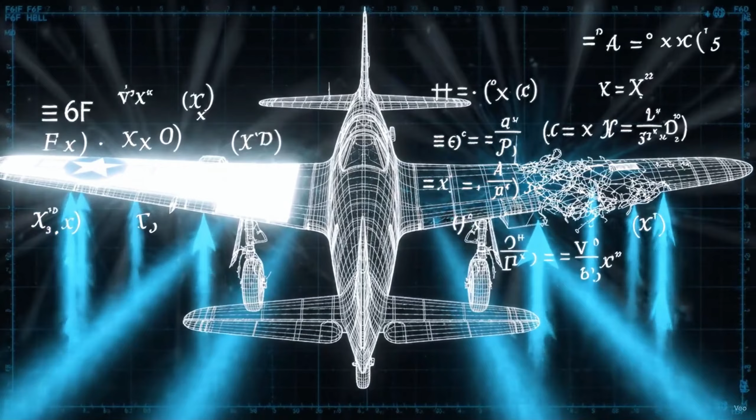Inside the armored vault, the processing node intervenes. Extreme physical force vectors are applied to the flight controls, mechanically forcing the remaining control surfaces to their absolute limits. The remaining control surfaces deflect to their geometric maximums. Because Grumman designed these surfaces intentionally oversized, they generate enough compensatory lift to counteract the missing wing area. Furthermore, the sheer excess capacity of the NACA 23015 airfoil proves its worth.

Even with 30% of the wing deleted, the remaining geometry generates enough lift to sustain flight. The violent instability is mathematically arrested. The heavily damaged wireframe levels out. Aerodynamic integrity is marginal, but stable. This survival is not a mathematical anomaly, it is the direct result of the Ironworks philosophy: over-engineered bulkheads, forged steel joints, and immense redundant lifting surfaces.

The final aerodynamic equation is written. Structural redundancy combined with excess lift equals absolute combat survivability. The extreme limits of the airframe have been tested and proven. The algorithm clears the battle damage, restoring the geometric wireframe to pristine condition. Now, we will merge all internal aerodynamic and kinetic systems into a single cohesive mechanical synthesis. To truly understand the absolute structural brute force of this aviation platform, the algorithm initiates the final total geometric deconstruction.